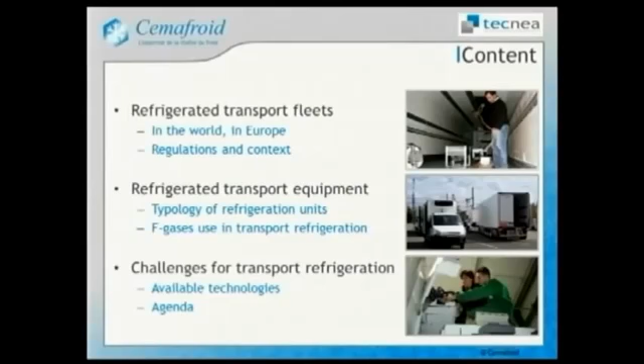We have a lot of data concerning these equipment, and it's why we have made this study on what is the situation regarding refrigeration in transport with F-gases, and what are the perspectives for the future in terms of replacement. So I will present the situation of the fleet in the world, in Europe, and context, and the situation of refrigeration in transport regarding F-gases use, and then the challenges we have to face.

Just the fleets, according to the RTOC report of 2010, roughly 4 million equipments are in service for transport refrigeration in the world, for terrestrial transport, and some 500,000 reefer containers. That is an average of one terrestrial equipment for 1,700 inhabitants, but this is very different from one country to another in the world.

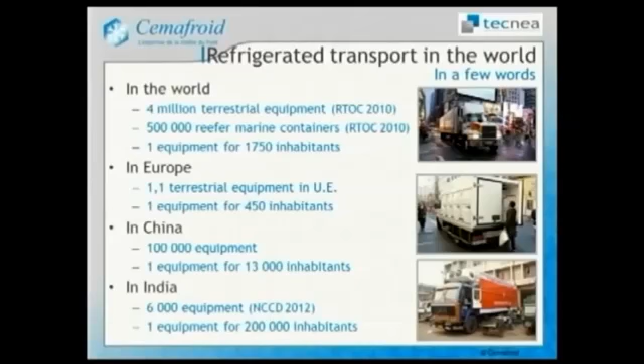In Europe, we can evaluate in the 27 countries of the European Union 1.1 million equipments, that is to say one for 450 people. It's a little bit less in China, and even less for India, according to NCCD data from 2012, with one equipment for 200,000 people. The market in the developed countries is a mature market where we are renewing the fleet, and roughly the average duration of one equipment is some 9 to 10 years, and 10 to 12% of the fleet is renewed each year in Europe in transport.

The main changes of the fleet and equipment are due to the evolution of the use of the equipment. The main challenge faced by transport is urban delivery. Our cities have changed, the habits of people, of consumption have changed also, and urban delivery is really the great challenge of transport, and refrigerated transport, of course, is one of the major ones. Massification in the transport from production to the distribution centers is also a big challenge.

Just data in France: in semi-trailers, the average load of fresh products is 10 tons per semi-trailer when the available load is 25. So we have less than 40% of use of this load. And also new products and new sensitivity. Health products, for example, are more and more temperature sensitive. Just in 2011, 50% of the new pharmaceutical products introduced in the market in France have to be kept between 2 and 8 degrees.

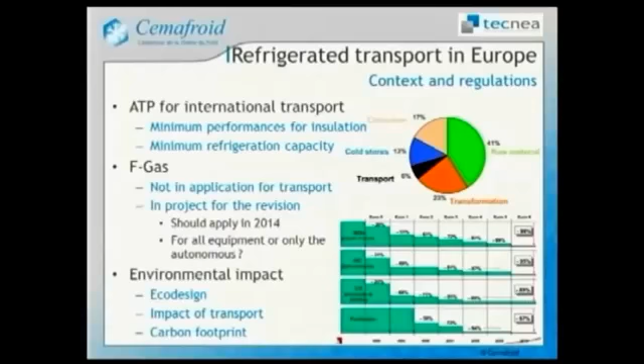In the global footprint of frozen products, for example, you have the graph on the right of the slide. You see that refrigerated transport is 6% of the total carbon footprint of frozen products we are consuming in Europe. In France, we have, I think by chance, a mandatory regulation for all equipment. That is to say, a high level of quality of this equipment, except for some uses such as short transport and vegetables. And the total fleet is 150,000 equipments.

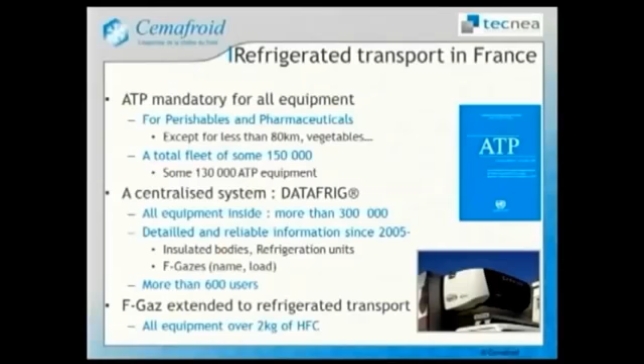But due to this mandatory regulation, we have a centralized system with all the data concerning the transport equipment, including the information concerning F-gas. And using this database, which includes 300,000 equipments, half of them still in service, half of them withdrawn, we access detailed information concerning F-gases in transport. And we have made the analysis of these uses of F-gas in transport in detail. First of all, an overview of the French fleet. 52% of the fleet is vans, less than 3.5 tons.

26%, roughly a quarter, is semi-trailers and trailers, and the 22 least percent is for trucks. Less than 1% are concerned by train equipments and mobile boxes.

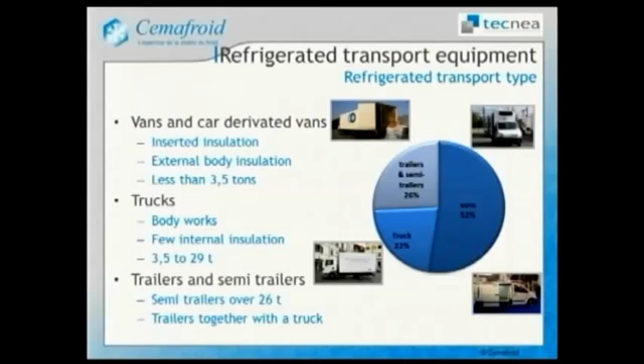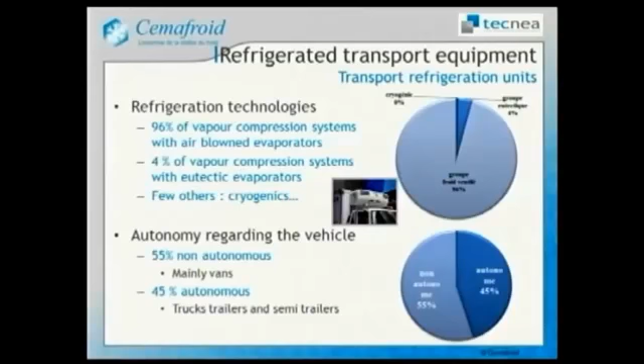In this fleet, 96% of the fleet is equipped with air-blown evaporator systems, for the refrigeration technology. Nearly all equipments are using vapor compression systems. And in this compression system, 4% are for eutectic systems, but including a refrigeration unit, and the other 96% are for air-blown evaporators.

Concerning the source of energy, 55% of this equipment are motor-driven equipment. That is to say, the engine of the vehicle is driving the compressor directly or indirectly. And 45% are autonomous. That is to say, they have a specific engine, generally a diesel engine, which is driving the compressor of the refrigeration machine.

A new kind of equipment that appeared in the 90s is multi-temp equipment. That is to say, in the same truck with the same unit, you manage to have at the same time 2 or 3 different temperatures. Now some 25% of the equipments in service are multi-compartment equipment. Most of them are only 2 compartments, but you see that it's quite a common thing. It's a way to improve the environmental efficiency, because you can, in the same truck, deliver 2 different products, such as frozen products and fresh products in the same shop.

Concerning the refrigeration machines, you see the spread of refrigeration capacities, and you see that 17% are between 5 and 10 kilowatts, and 30% are over 10 kilowatts, containing the biggest ones. And generally, you have an average size of the refrigeration machines here, but also technology is available. Most of them are vapor compression systems.

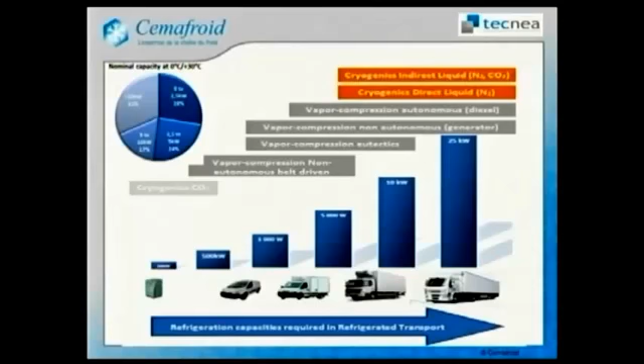You see that on the left you have a solid cryogenic system for small containers, for example, very small volumes, generally less than 1 cubic meter, and at the other side, which appeared in the 70s, but again in the last few years, direct cryogenic systems using liquid, but this remains a niche and equipped only some tens of equipment in France.

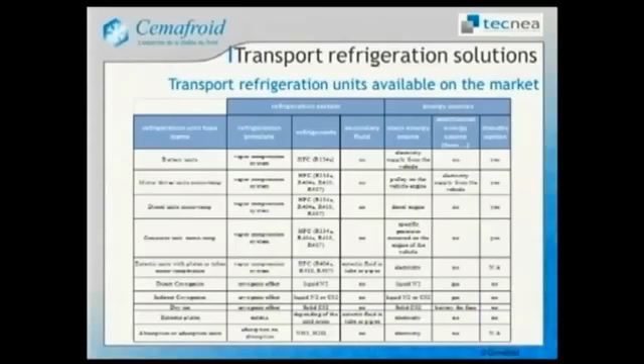In this table you have the different technologies. We won't go in details through the technology, but you see first that mainly when you withdraw the cryogenic systems, solid or liquid ones, you have at least 4 fluids used, but 2 main fluids, that is 134A and 404A, that are mainly used. And in fact, when we analyze F-gas used in transport, 95% in mass of the fluids installed in the French refrigeration systems in transport are 404A. So the whole fleet is impacted by the F-gas project directly if transport is included.

4% is 134A, and less than 1%, less than 0.5%, is 410A. But this is not exactly the same in other countries. Nevertheless, roughly we have here the spread of the fluids in the world fleet. You have also the mass of fluids that was installed in the production of 1 year. To say, in 2011 it was 47 tons of fluids and 45 tons of 404A.

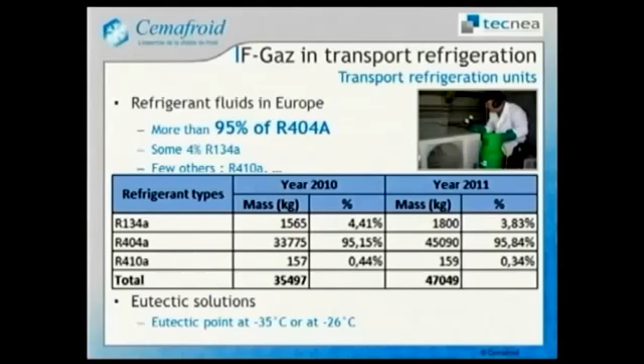Some I just mentioned in the eutectic system. They are also using a second fluid in the plates or tubes, and it's a eutectic solution with a freezing point at -35 or -26. And this is quite an important volume, but it is something different.

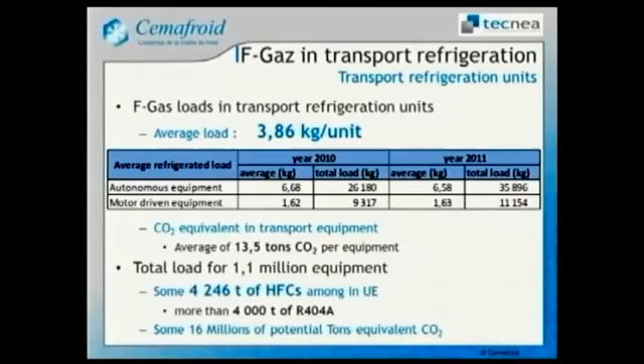The average load of this unit is 3.86 kilograms per unit. It is quite variable, from small units, which you have seen are 50% of the market roughly, where you have 1.5, 1.6 kilograms, to the autonomous systems for trucks and trailers, where you find roughly 6.5 kilograms per unit. The average load for 1.1 million equipment in Europe is 4,200 tons of HFCs in the transport refrigeration systems, and if we transfer it, it's 16 million tons of CO2 equivalent.

So in this situation, what are the solutions for the future, alternatives? This is the evolution. Roughly the vapor compression system for transport refrigeration units has not really changed for 50 or 60 years now. We still have the same conception of the machines. There was no real innovation. We have gained in terms of reliability, of lifetime. The first revision now for the last machine you have in the middle is 3,000 hours before a revision. Before it was far shorter. We have reduced the risk of breakdown of the units on the road and so on. But roughly the techniques are the same.

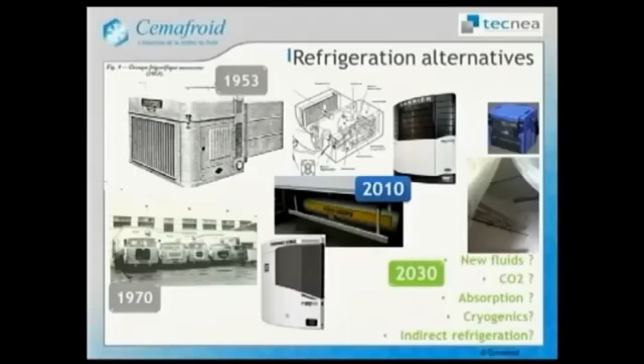The fleet in the 70s here already had a cryogenic system, a direct liquid cryogenic system, equipping the fleet of yogurt distribution. And it's exactly the same as you have under the 2010 system of cryogenic liquids. So no real evolution in the mass market, but tests are ongoing on CO2 equipments.

And this is already on field test; for marine transport it is already on sale, and for road transport it is already on field test. Some absorption, but only for small volume, the blue one on the right, and other tests are really on the research level. The only available technologies are still vapor compression systems using CO2, which is the most convenient for the near future, the short term.

In conclusion, refrigerated transport will be directly and strongly impacted by the F-gas project because of the majority of 404A in the equipment. There is already on the market a partial solution, a cryogenic system, for example, but this will remain a niche. It has its place, it's a good solution, but not for all kinds of application. It will remain a very limited solution.

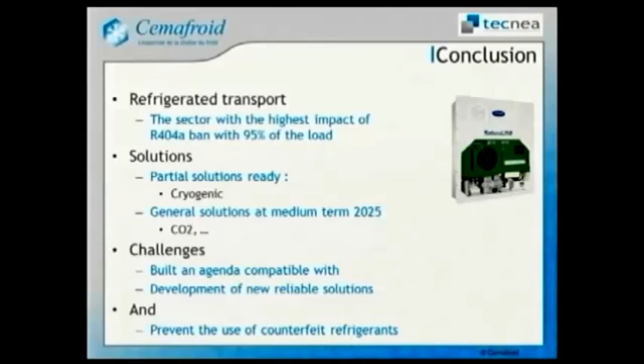And another challenge that is quite important in transport is to prevent the use of counterfeit refrigerants. Already people died repairing marine containers because of the use of counterfeit refrigerants. We have edited an informatory note of IIR on this issue, and now counterfeit refrigerants with hydrocarbons are appearing to replace 134A or R404. So it's also a safety challenge to manage the counterfeit refrigerants.